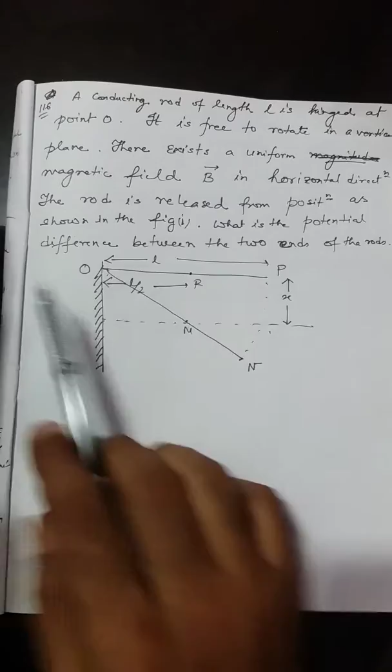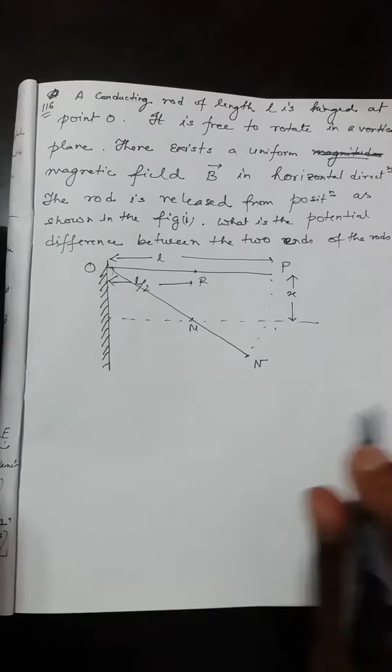Here it is mentioned that a conducting rod of length L is hinged at a particular point O. That means this is the length of the conducting rod, OP, which is hinged at point O, and it is free to rotate in a vertical plane. So the rod can rotate like this; this is the vertical rotation of the rod about the point O.

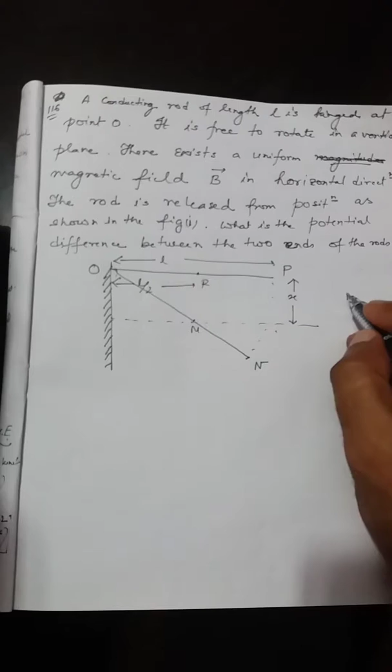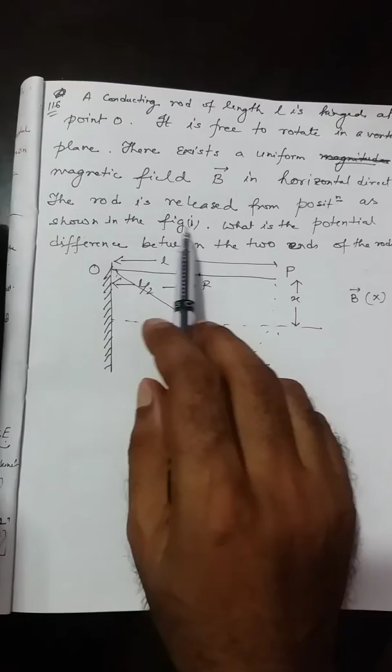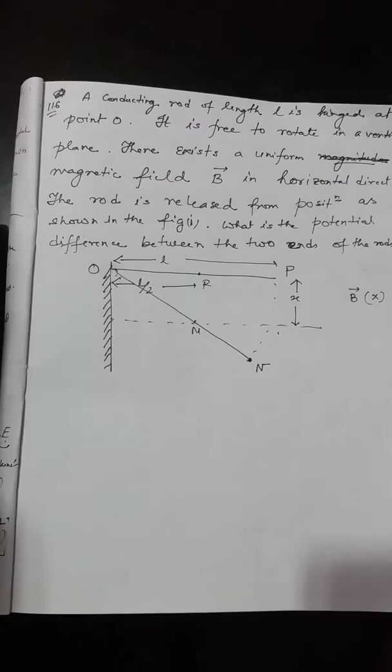Now there exists a uniform magnetic field B, in the horizontal direction. The rod is released from the position shown in the figure, and we have to find the potential difference between the two ends. That is the question: find the potential difference, the induced EMF, between the point O and the point N.

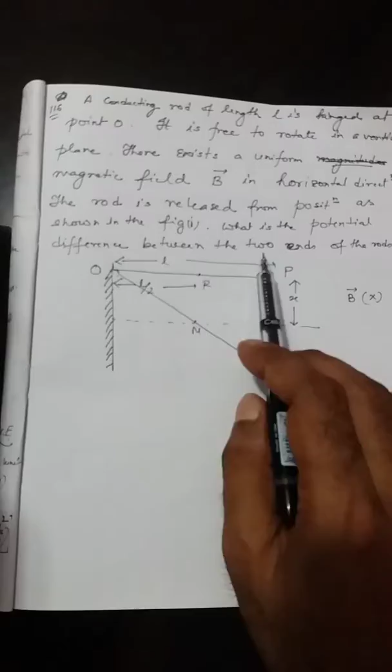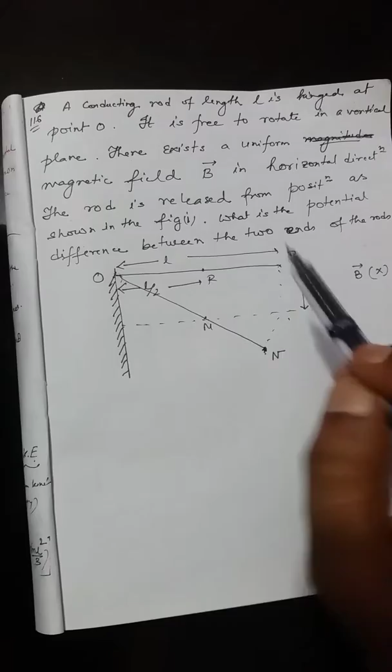First we will use the conservation of energy principle. The rod is fixed at point O, and it falls from point P to N. The extreme end of the rod was P, and when it is dislodged and reaches point N, what is the displacement of its CG? The mass of the rod is m, so the weight mg acts in the vertical direction from the point R.

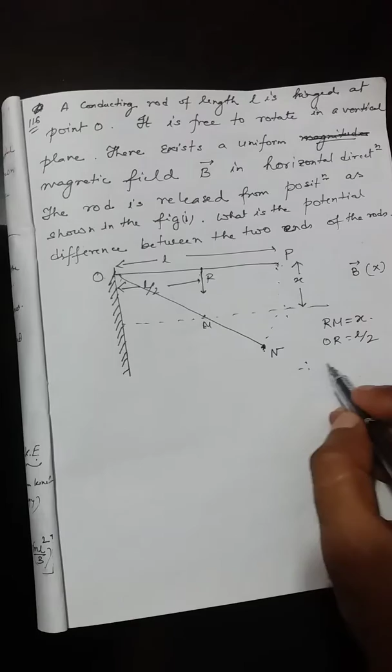If we consider this as x, then RM will also be x. OR, this length, will be L by 2. So we can write x divided by L by 2 is equal to sine theta, as per trigonometry. So x is equal to L by 2 sine theta. This will be our simple first equation.

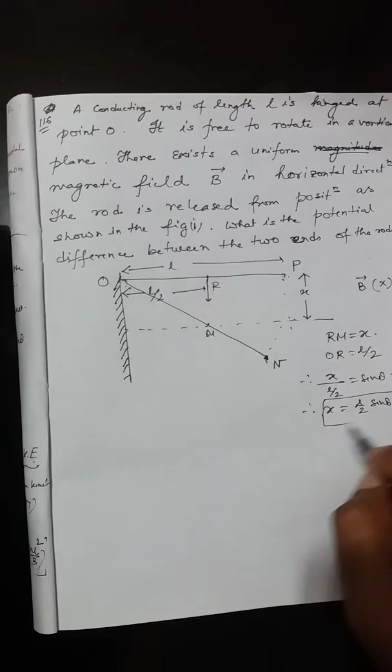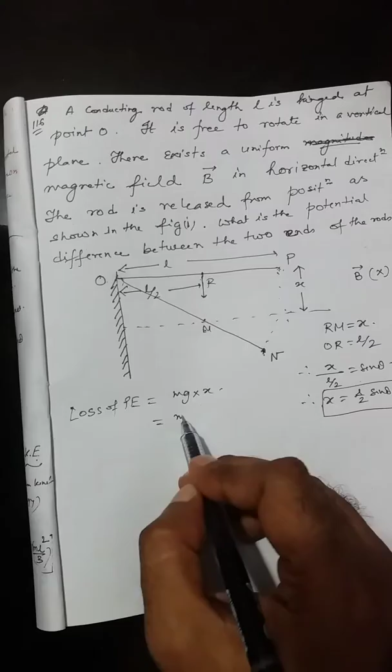Now from the free body diagram, the loss of potential energy is m into g into x, which will be m into g into L by 2 into sine theta. This will be equation number 1: the loss of potential energy of the rod when it is dislodged from point P and reaches point N, calculated on the basis of the displacement of its CG.

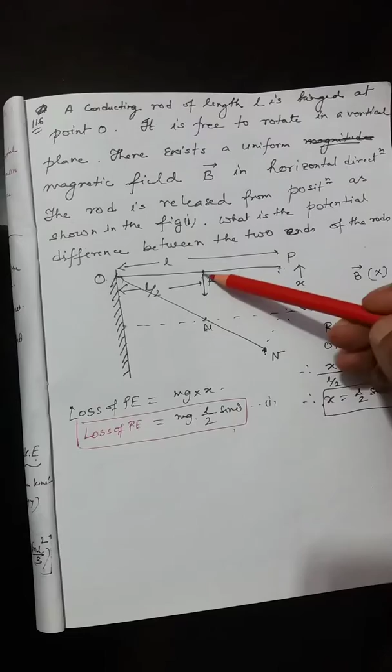I mean how much displacement of the CG of this particular rod has taken place. Next we have to find out what is the gain of kinetic energy. That means we know that gain of kinetic energy is equal to the loss of potential energy.

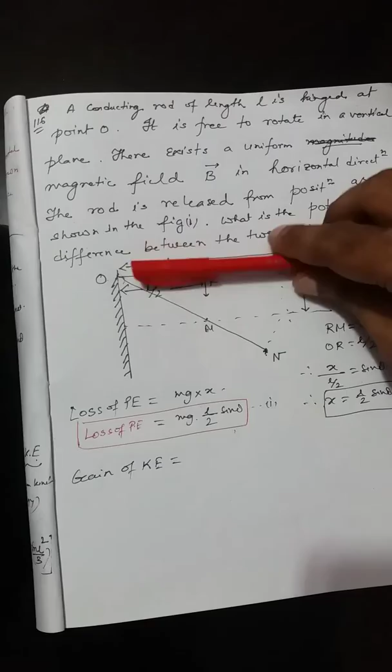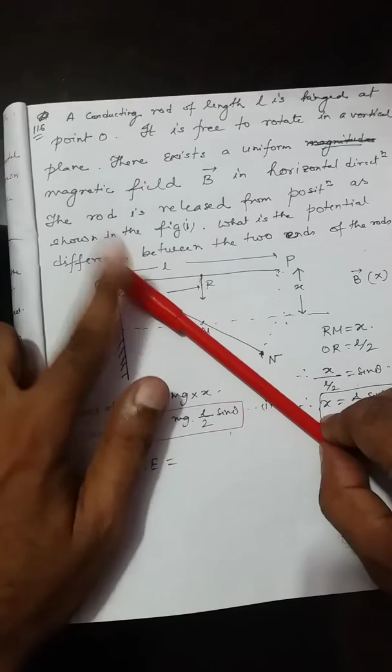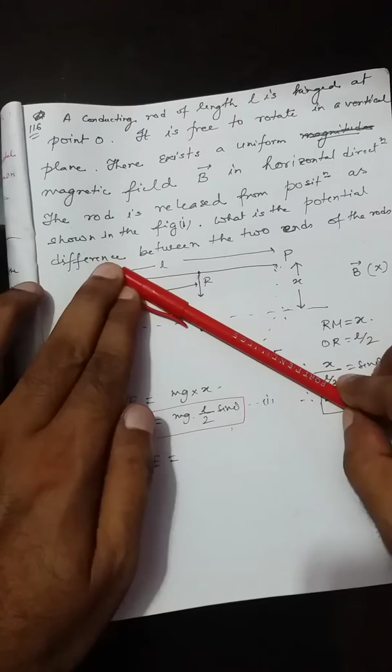Now first thing, once that particular rod has dislodged, just look into this area. The rod is fixed at one end, so if it is dislodged, definitely it will move like this because this side is fixed. Now, once it is moved like this, it is quite clear there is no translational energy. That means no translational kinetic energy is present. Only rotational kinetic energy is present within the rod.

So we can write down the gain of kinetic energy means translational kinetic energy plus rotational kinetic energy. Now in this case, translational kinetic energy in this particular rod will be zero, because there is absolutely no translational movement of the CG, because CG has reached maybe in this particular position.

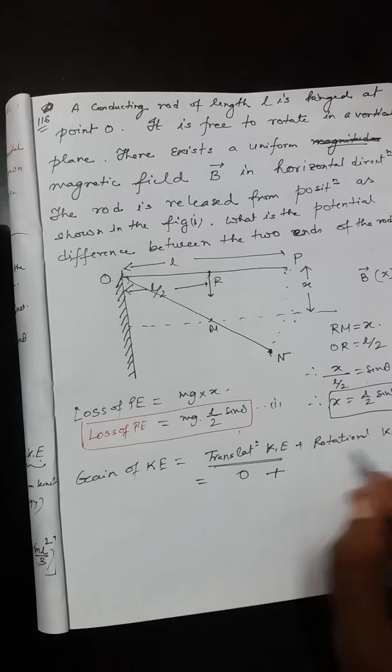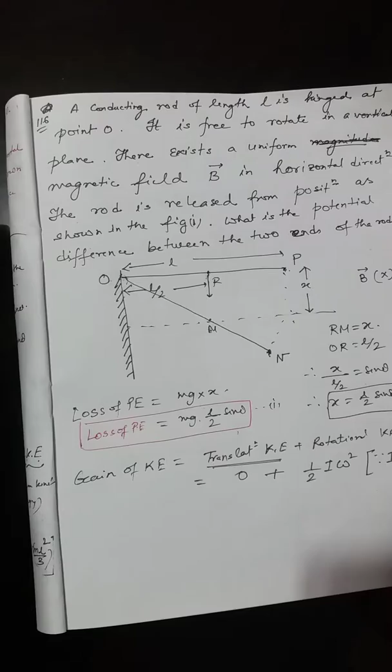So rotational kinetic energy of the rod will be half into I into omega square, where omega is the angular velocity of the rod at the furthest end, that means at the point P. So we know from the moment of inertia the value of I for a rod when it is fixed at a particular point, that is m into L square by 3. So if we put this value over here, then we will get m into L square by 3 into omega square. So this will be equation number 2.

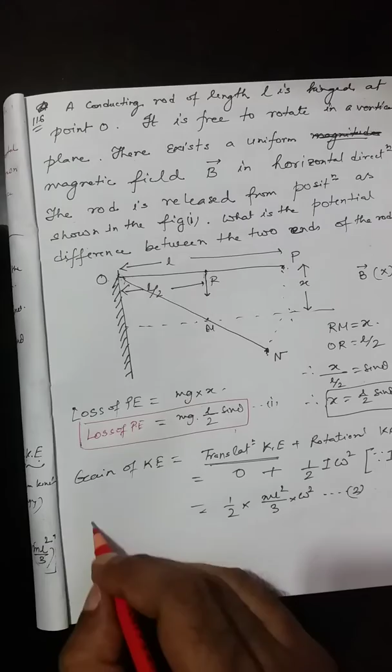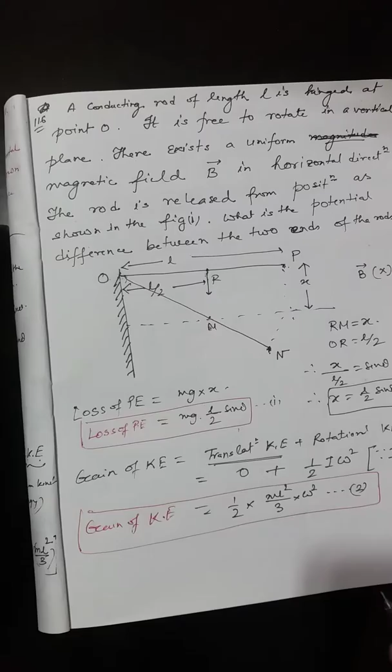So we can say that the gain of kinetic energy will be equal to half into m into L square by 3 into omega square. Now as we know that the loss of potential energy is equal to the gain of kinetic energy, so equation 2 and equation 1 will be equal. Okay, so we can write down m into L square by 3 into omega square. This will be equal to m into g L by 2 sine theta.

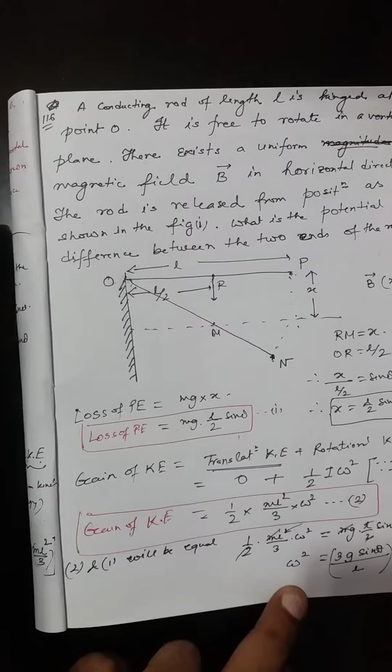Now if we strike out m, and strike out 2 also, and strike out one L, we will get omega square is equal to 3g sine theta divided by L. So from here we will get the value of omega, that will be root over of 3g sine theta by L. So that is the omega.

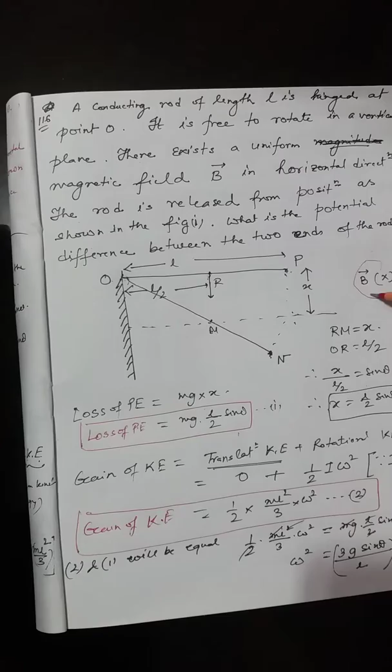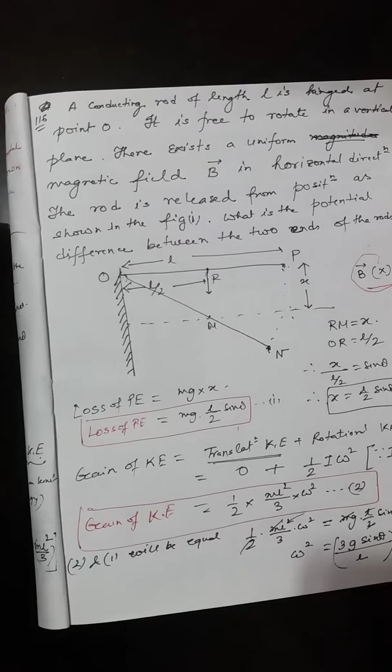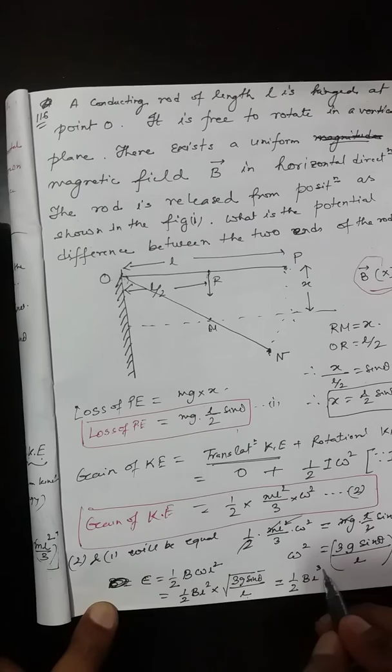Now value of omega you already know, so ultimately we will put that value into B into L square into omega. So the value of omega will be root over of 3g sine theta by L. So ultimately, because here L to the power half and here square, this will be 3 by 2, and in this case it will be g sine theta. So this will be the final answer.